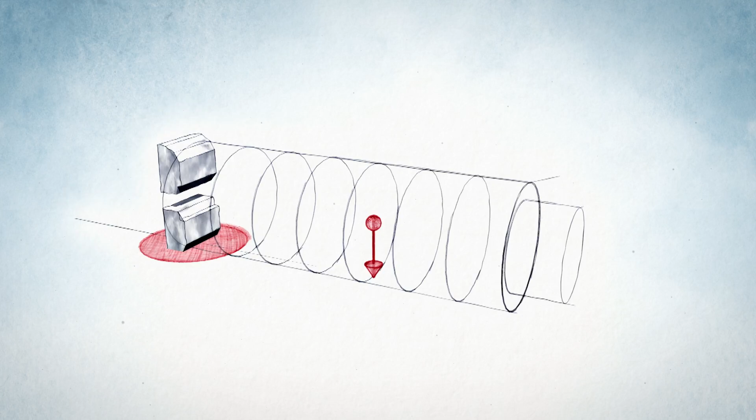With big builds, even the smallest mistake can be a huge disaster. From miscalculations to misunderstandings, these are the massive engineering mistakes that only an expert can hope to fix.

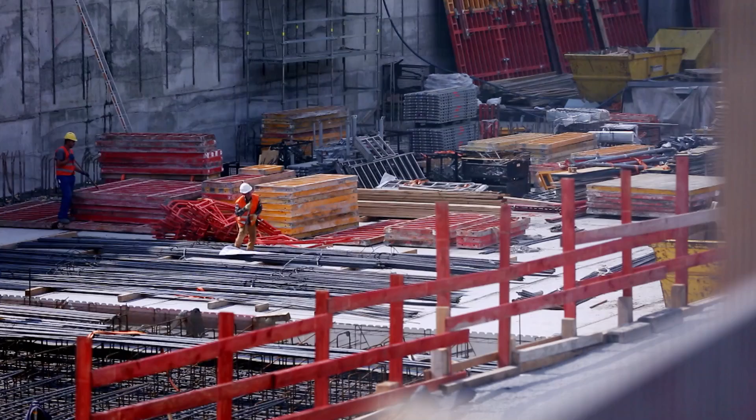When it comes to revolutionary design, sometimes we can learn from the past, other times we can improve on it. But rebuilding on an old foundation can be a huge mistake. For this construction calamity, we head to Pennsylvania, USA, and a famous bridge that fell from grace.

This is a massive fail. It's utterly incredible that no one got hurt. If a train was going over it, it doesn't bear thinking about. What was once considered the eighth wonder of the world is now a relic of engineering oversight.

The small town of Kinzua, like many other places in Pennsylvania, was central to America's steel production. In the 1880s, demand spiked and trainloads of coal were needed to feed the factories. Railroad engineers faced a giant obstacle, the steep, deep Kinzua Gorge off the foothills of the Appalachian Mountains. The trains had to get through, so they set to work on one of the most ambitious construction projects of the day, the Kinzua Bridge.

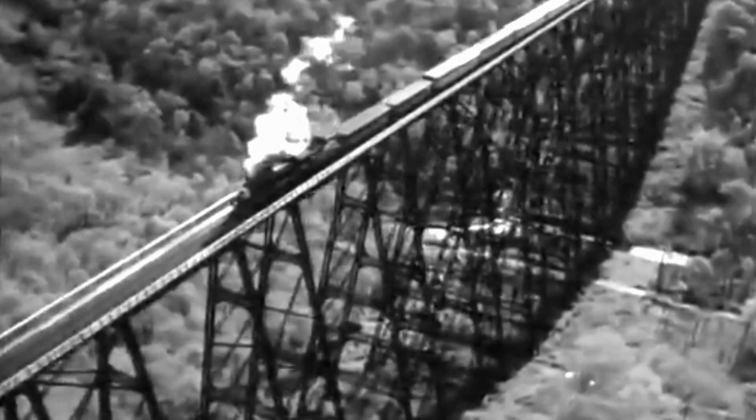Completed in 1882, at over 300 feet tall and 2,000 feet long, Kinzua Bridge was the tallest railroad bridge in the world. At the time, this was pretty much the eighth wonder of the world. It was such an unbelievable achievement. Even with today's technology, this would be a challenge, let alone back in the 1800s. So to actually achieve a viaduct over that size gap was incredible.

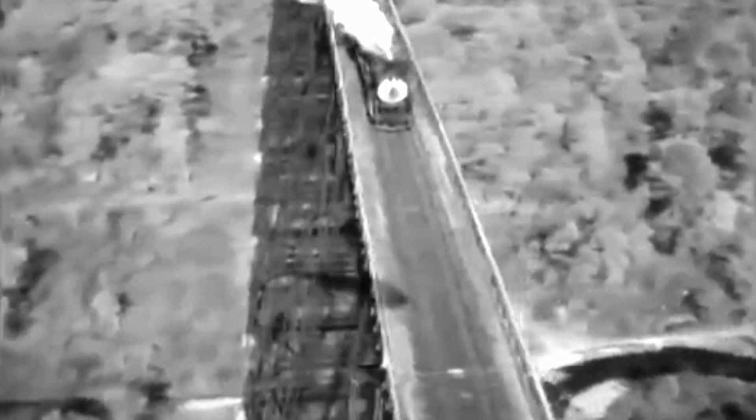Jerry Clark from the Bridge Foundation knows what made this build so epic. Other railroads went around the Kinzua Valley. The bridge went across it and used every bit of the engineering technology available during that time. To achieve this shorter direct route, the bridge had to be high, long, and capable of supporting heavy coal trains. Engineers ruled out the conventional bridge-making materials, stone and cast iron, instead choosing wrought iron.

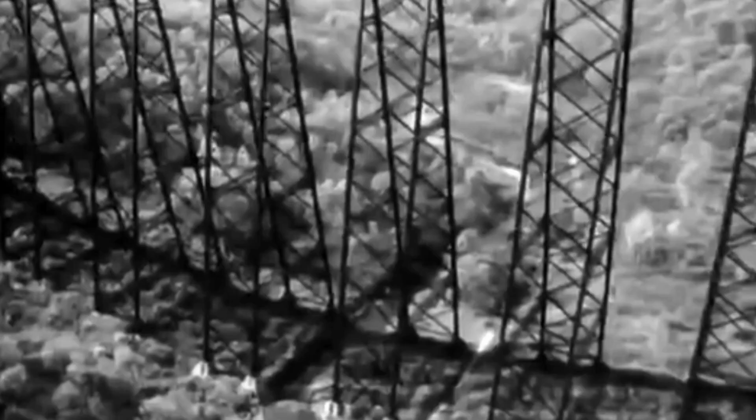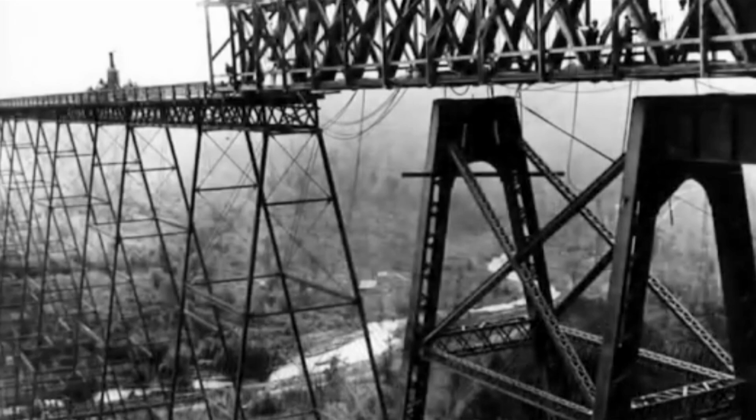Building a bridge of this size out of stone or brick would have taken forever, and using cast iron would have been too brittle, so they looked to wrought iron as a suitable material. Wrought iron had another advantage too. It's malleable. So they used sheets of iron to create an innovative support structure known as phoenix columns. These phoenix columns were made out of wrought iron that was folded around and held together with rivets, and this made them stronger and lighter. The revolutionary design was also quicker and cheaper to build.

However, within a decade, locomotives doubled in weight. This meant more strain on the bridge and more vibrations. Vibrations are not a bridge's friend. You expect them up to a point, but here we had a tall, long bridge with trains going over. The trains were getting heavier and heavier. They had to be careful not to push it too far. The material could withstand it to a point, but whatever they did not want that material to crack.

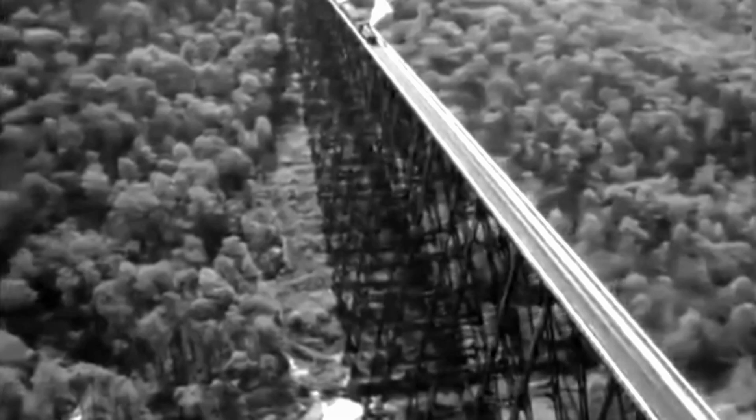To minimize vibrations, trains were forced to cross at just 8 kilometers an hour, not the most practical solution in a fast-moving world. Fortunately, an alternative was now readily available: steel. At the time, steel was the strongest, lightest and most flexible bridge-making material around. So it sounds crazy, but they actually ripped the old Kinzua Bridge down and rebuilt it in steel.

No bridge meant no coal, so a quick construction was essential. And in just a matter of months, 120 men erected the new bridge. 90 days is all it took to completely rebuild the tallest railroad bridge in existence. The new steel bridge used the original trestle design, with large A-frames supporting the pier on top. It could now carry as much coal as the steel mills needed. But in an effort to save time, a decision was made that would turn out to be disastrous.

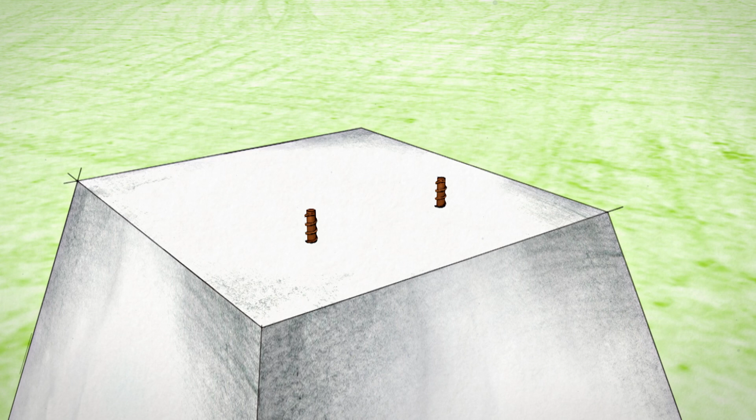Rather than installing new steel anchor bolts to hold the bridge in place, the legs were secured to existing bolts. They were too short, so engineers used extending nuts called collars to bridge the gap. So replacing these anchor bolts would have taken forever. You would have needed to dig out, blast away. It would have been a real hassle. So instead, they just put these collars over the top of it.

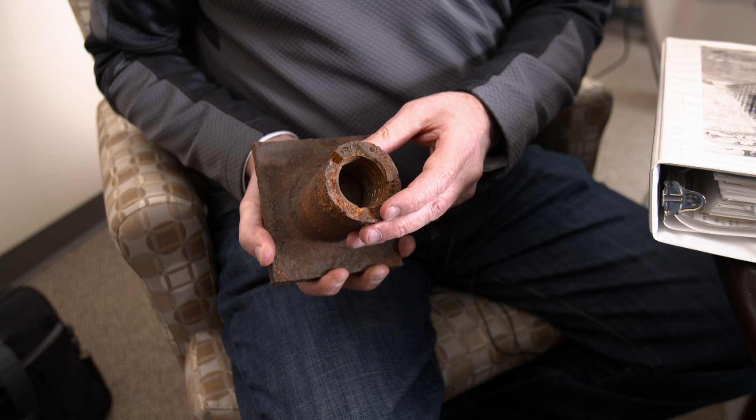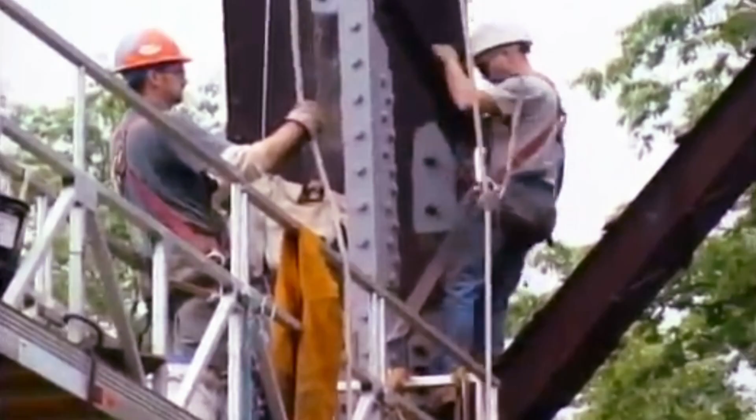At the time, the collars seemed a reasonable solution, but they hadn't completely factored in Mother Nature. This quick fix did the trick, and the bridge carried freight and passenger trains for over a century without incident. In 2002, a maintenance team discovered corrosion on the bridge's legs. They closed the bridge to trains and pedestrians and began repair works.

But in the summer of 2003, disaster loomed. An epic tornado spiraled towards the Kinzua Gorge. Structural engineer Brian Emberg was on the restoration team. In July of 2003, I got a phone call, middle of the afternoon, that a tornado had hit the bridge. I jumped in my vehicle right away, made the trip, and got here right about dusk. And it was clearly a tornado scene, trees everywhere, clouds and mist.

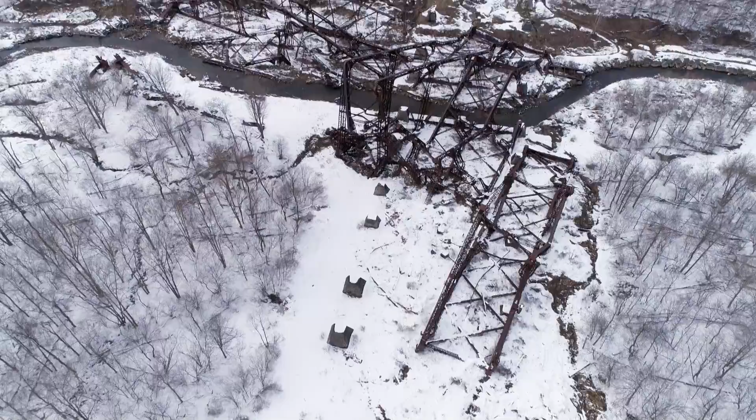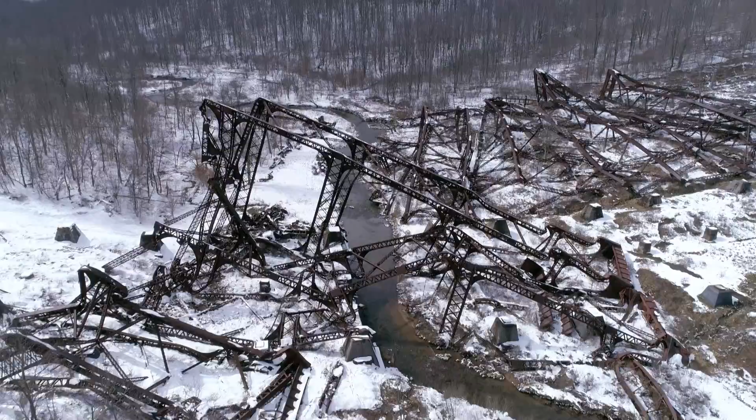I met with the crew and made my way down here to the edge of the ravine and turned the corner, and the valley just looked filled with smoke like you would expect after a battle. You could barely start to make out the structure in the fading light, and you could see pieces of steel emerging from the fog, and then what remained of the structure still standing. It was clear it was a catastrophic failure. The 160-kilometer-an-hour tornado had sent a huge section of the bridge crashing to the valley floor.

This must have been so frustrating. They were onto this problem. They saw it. They were acting on it. So if it struck a few months later, they would have been fine. This is such bad luck. Although devastating to the repair team that spotted the corrosion, closing the bridge had potentially saved hundreds of lives.

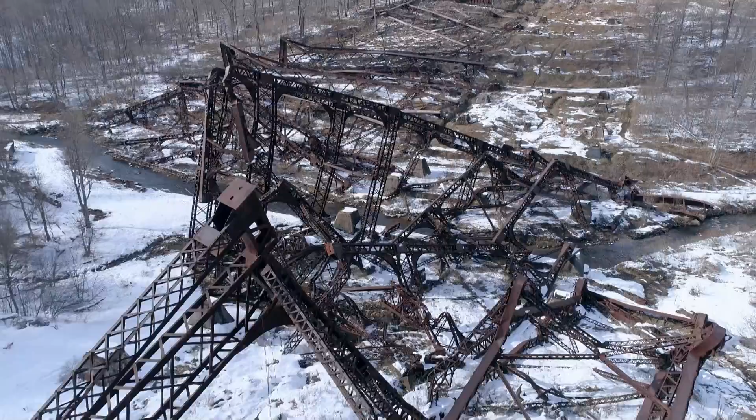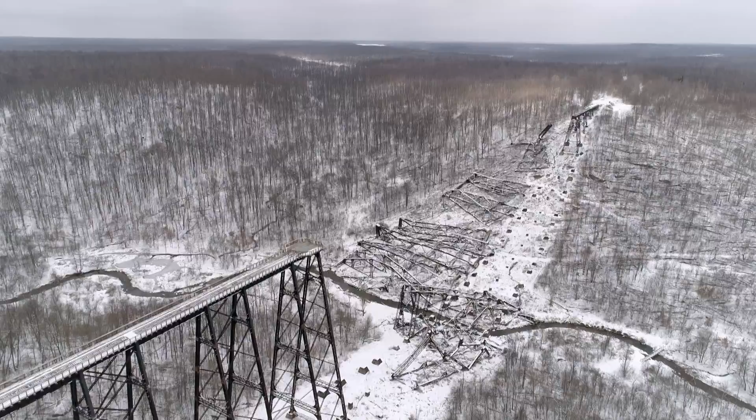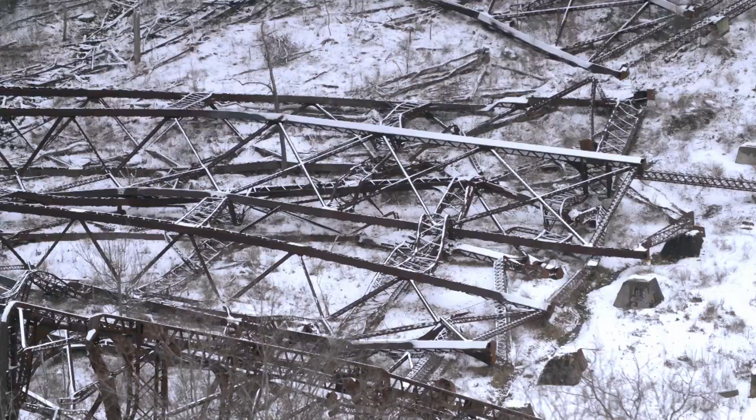To have such a freak of nature storm come in and take it down was really devastating to my crew, my team, and me personally, that we weren't able to get to it and save it in time. Had the tornado arrived a year later, we'd have finished with the repairs and hopefully sustained the structure so it would have survived the storm. The day that it fell down in there, you kind of felt like you lost a family member.

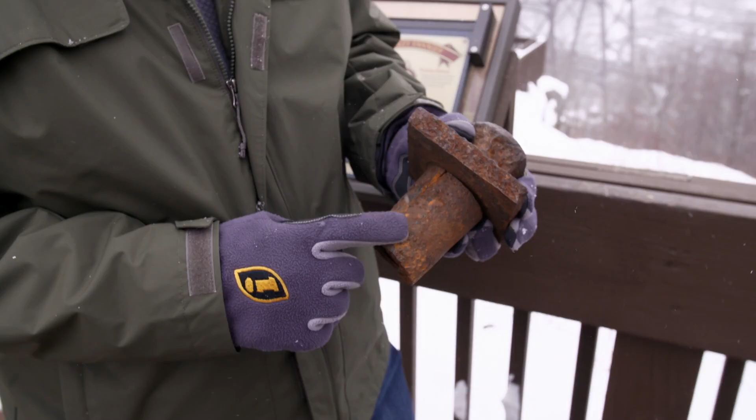Brian and his engineering team suspected the original iron anchor bolts and new steel collars were to blame, and their suspicions were confirmed in the wreckage. So the next morning, I went down to the valley and found these anchor bolts and couplings littering the floor of the valley everywhere, where they had ruptured and failed at almost every single pier. The choice not to replace the iron anchor bolts with steel was catastrophic.

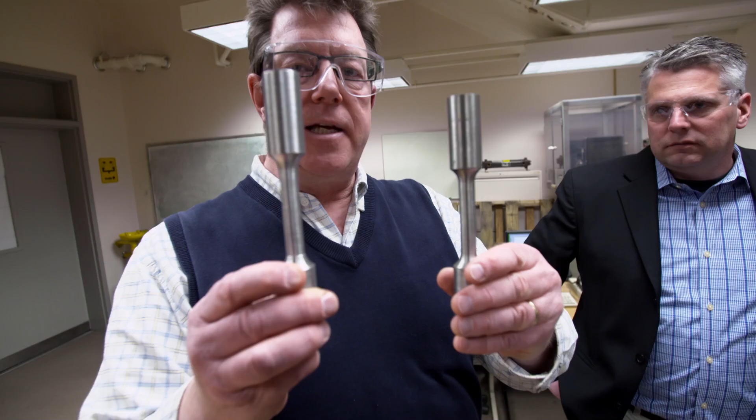To demonstrate steel's strength and flexibility, mechanical engineers Dr. Mark Zupan and Dr. Tim Topoleski are using a load frame. The one on the right is 1018 steel, and the one on the left is cast iron. You can kind of see that they look similar. So looks can be deceiving. And what we're going to do is test the two of them and see what happens. The load frame measures the amount of force required to fracture the metal by pulling it from each end.

First up, the iron. In tension, cast iron expresses a brittle behavior, or a behavior in which it'll fail without warning. Now, the steel. There it goes. The steel exhibits what we call ductile behavior. You'll see the specimen narrow in the middle, and that's what we call yield behavior. And essentially, the specimen is absorbing energy to allow it to handle more load. And therefore, in contrast to the cast iron, you're going to get a warning before it fails.

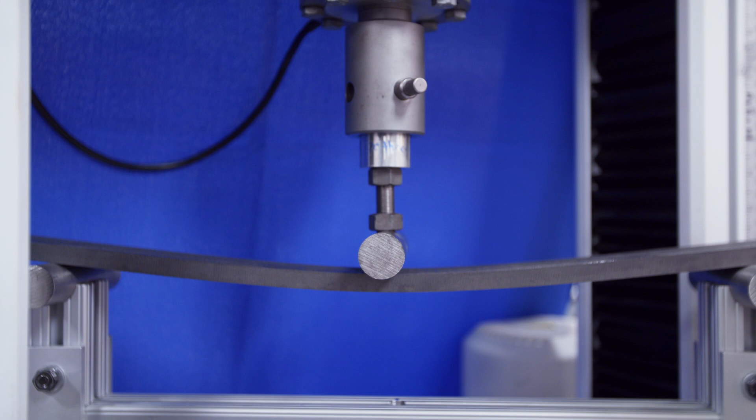So, although similar, steel's structure gives it increased flexibility, whereas iron can crack without warning. Metals can either be brittle or ductile. A brittle material like cast iron shatters when it breaks, much like glass. A ductile material like steel, though, deforms before it breaks. So it gives you a visible warning sign that failure is about to occur. So when you use steel in a bridge, you get a warning that it's about to break before it does.

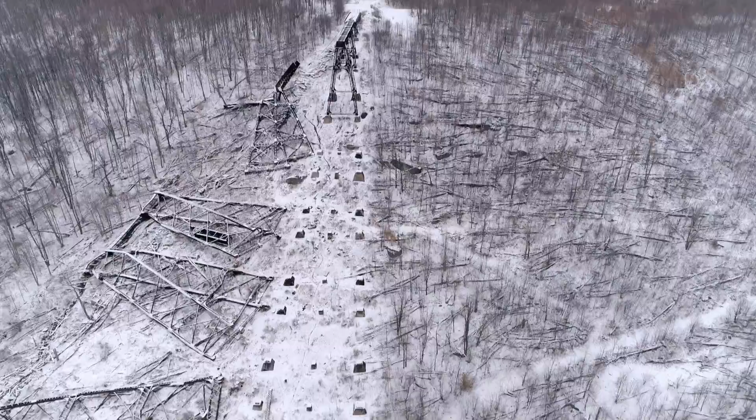Although steel was clearly the stronger and more flexible material, the bridge's iron anchor bolts didn't fail until the tornado of 2003. The problem was that the original designer didn't think there was going to be uplift. An uplift comes from wind blowing on the towers. When wind blows on the tower, it wants to try and overturn it, and so on this leg, there would be uplift. The original designer, he used these because he didn't think there would be uplift, when in fact there would be with a 100-mile-an-hour wind.

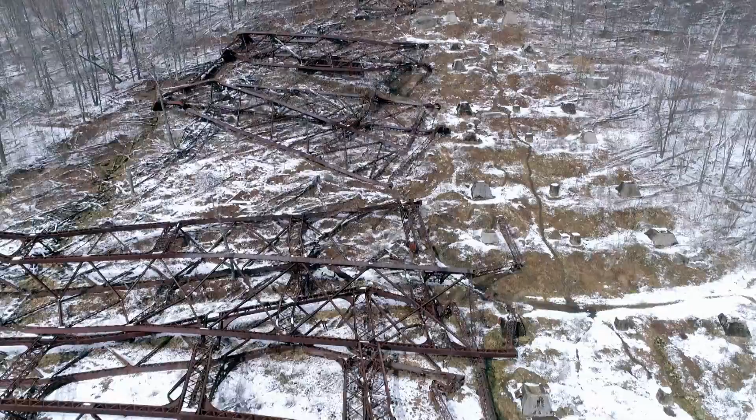And it turned out to be inferior, especially after years of wear and tear, and it cracked. A combination of extreme weather and the decision not to replace the anchor bolts over a century ago was the undoing of this epic piece of engineering. This was a hugely ambitious project, and at the time it really pushed the boundaries of engineering knowledge, and it looks like a tiny miscalculation and the use of these collars unfortunately led to the demise of this bridge.

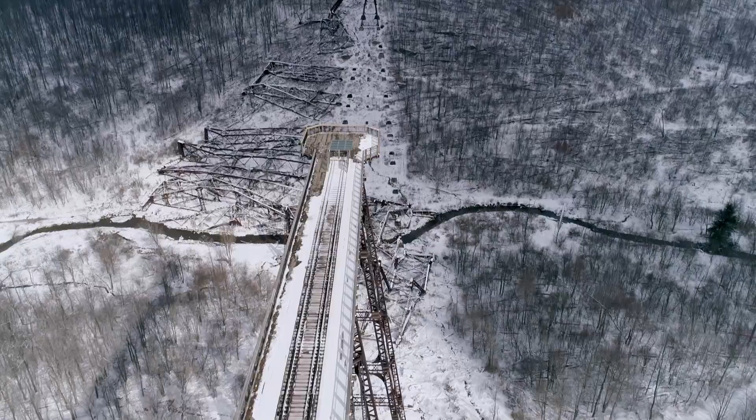Today, around 180 meters of the structure still stands. Rather than tear it down, it was kept as a monument to mankind's ingenuity in engineering. Everything here could have been scrap metal, but there were people that had the foresight to say, this is worth saving. Actually, there are more people that come to the bridge after it was down than when it was up.

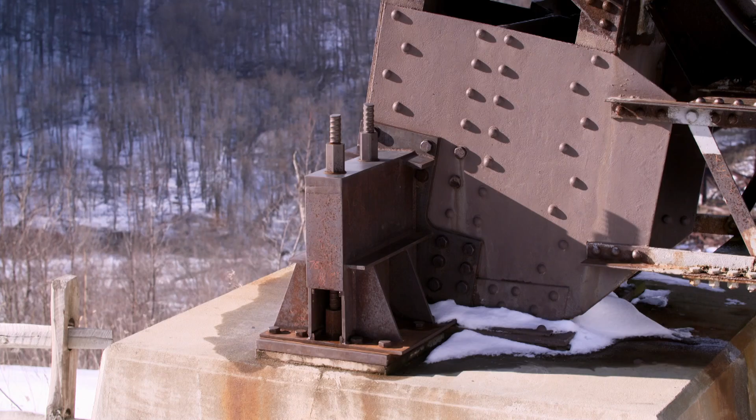To prevent any further collapse, Brian and his team have devised a solution. It's no surprise that it includes steel anchor bolts, an idea that the original engineers overlooked. When it comes to the foundations, you should never cut corners. It may have taken over 100 years, but that lesson was learned in spectacular style.

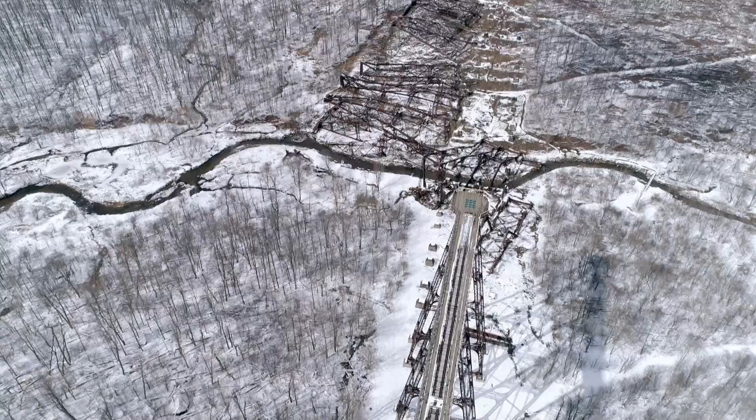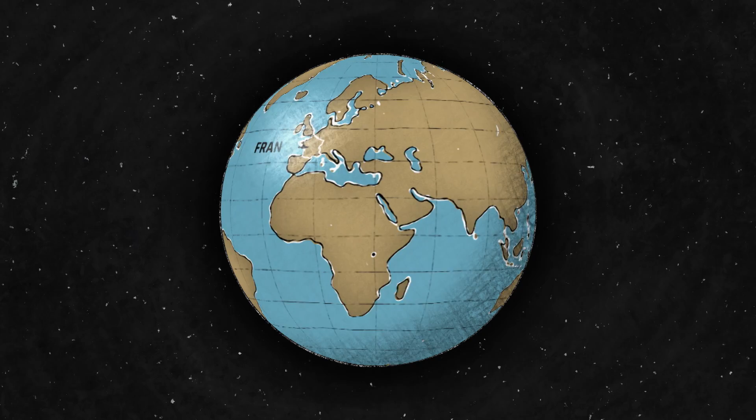Some construction calamities are unhappy accidents, but other times, engineers really should have known better. Like this story in northern France, and a cathedral that's experienced a catalog of catastrophes. This one is a blockbuster of a building blunder. It seems the engineers' zeal to reach the skies clouded their better judgment. This cathedral has been the victim of a combination of tragedy and folly. And when modern-day engineers tried to make a fix, it almost ended in disaster. It's a miracle it's still standing.

Beauvais, a small city in northern France. But there's nothing small about its 800-year-old centerpiece, the gravity-defying Cathedral of Saint-Pierre. So we've got Sagrada Familia, yep, Notre Dame, yep, St. Paul's, but St. Pierre's of Beauvais. Although little known outside of France, the ambition of this cathedral once rivaled any other on Earth. Dr. Tom Nixon is an expert in religious architecture.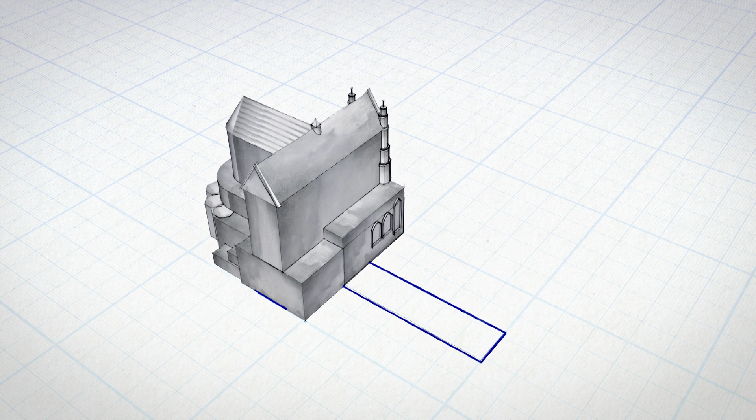Beauvais Cathedral was begun in the 1220s by an extremely ambitious Archbishop, Bishop Miles of Nanteuil, and his vision for this cathedral was really something that would trump all the other major churches in France and the region. Most cathedrals are designed in the shape of a cross, with three main sections: the choir for the clergy, the transept, which forms the arms, and the nave for the congregation. The nave is often long and grand, but here there was an obstacle.

Now, Beauvais could never be particularly long because the site was constricted by the presence of the Bishop's Palace at the West End. So it could respond to the ambitions of its patrons by being, first of all, very wide, but it could also be very, very tall. And this church, as built, was taller than any Gothic building ever built. And size was very important. With cathedrals, just like stadiums and concert halls, the aim is to have as much space as possible under one roof. But of course, the taller and wider you go, the bigger the engineering challenge. And the greater the chance of making catastrophic mistakes.

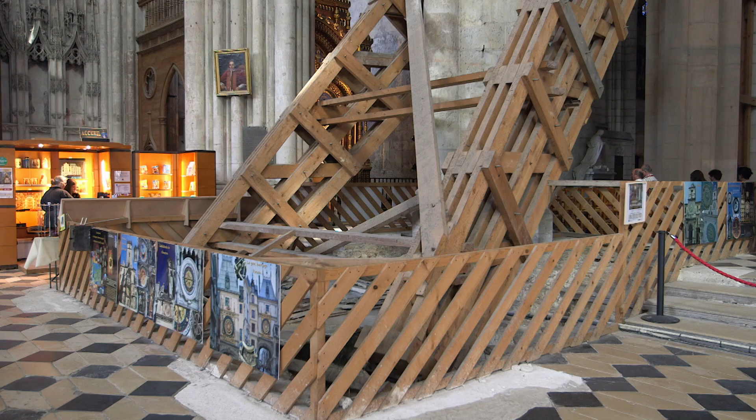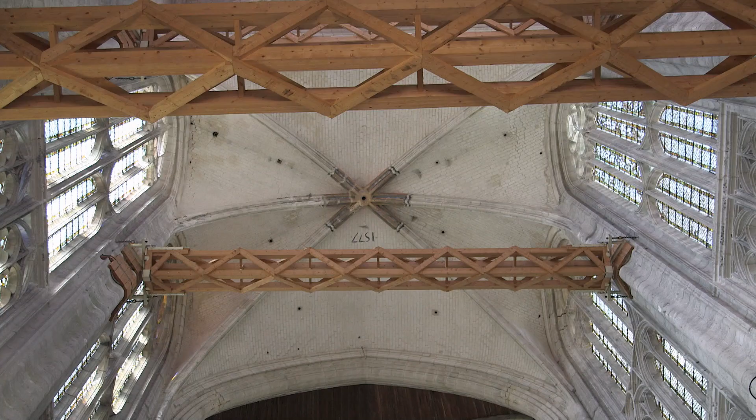On close inspection, the grandeur of Saint-Pierre is overshadowed by centuries of repairs that literally hold the building together. And it's all because the original engineers were more focused on height than stability. In fact, their drive for height was so relentless that they had to hold up the tall, unstable walls from the outside.

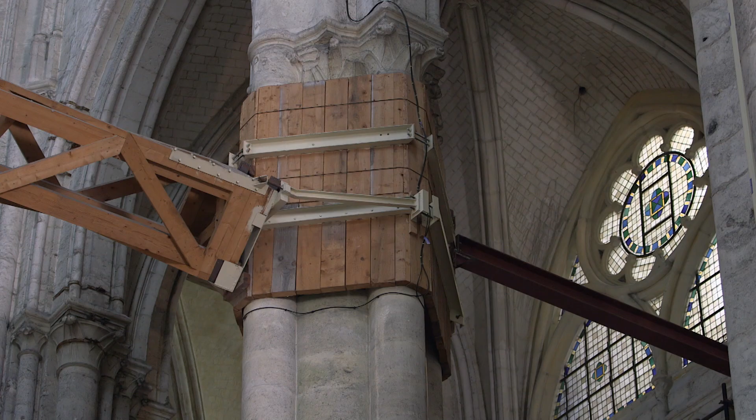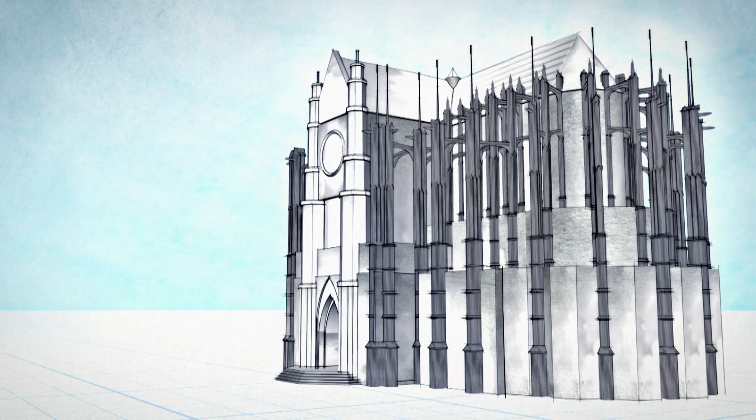So it's really remarkable to be able to come up here to the upper parts of the cathedral. Up here, we can really get a sense of the way that this forest of flying buttresses supports the upper levels of the choir. And what's really extraordinary, I think, is many of these flyers, these piers, are still super slender. Flying buttresses act as an exterior skeleton to support the cathedral, but are built to look ornate and elegant, not like mere scaffolding. Engineers hoped these buttresses would be strong enough to prevent collapse.

They're working very hard to ensure that the windows are not obstructed at all, so that we have this wonderful kind of sense of vertical thrust from the cathedral, even though, of course, the reality is the very opposite. What we have is gravity trying to pull this building down.

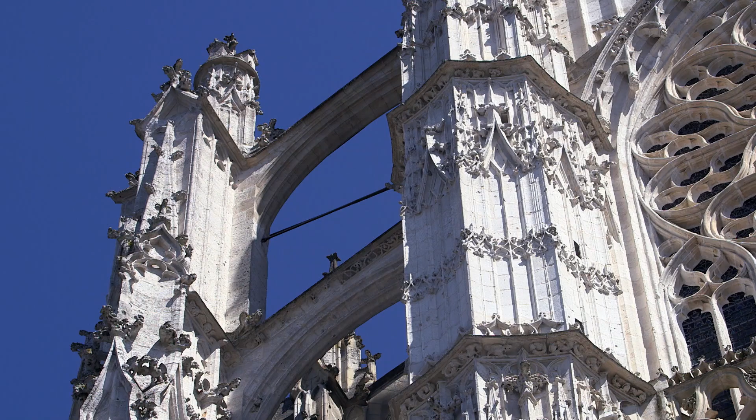Back in 1284, Saint-Pierre's ongoing battle with gravity came to a head when a fierce storm hit the town of Beauvais. The devastating winds twisted the flying buttresses, forcing them to breaking point. Suddenly, the high vaulted ceiling came crashing down. The city didn't let that stop progress. The damage was repaired and construction continued.

In the 1500s, the cathedral reached dizzying new heights, with the lantern tower soaring over the choir. Jean-Lucien Guénon, one of France's chief architects, explains.

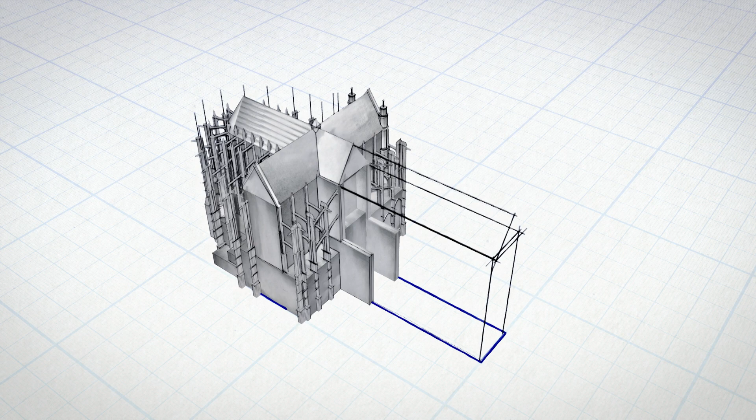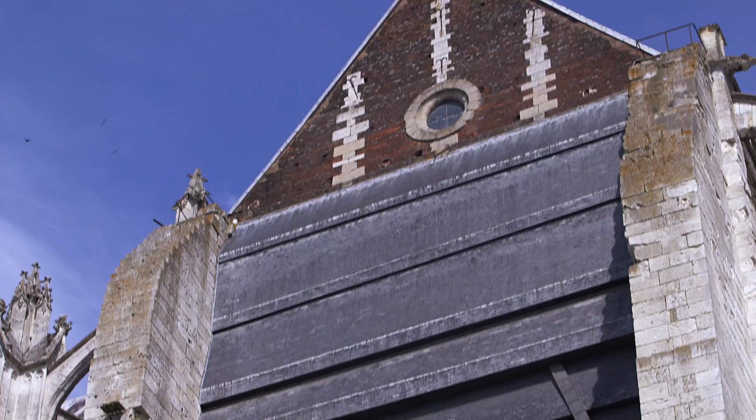Defying centuries of cathedral construction logic, Saint-Pierre's was built with only the start of a key structural element: a nave. So here we can see the junction of the 10th century cathedral, which originally extended much further to the west, and the new work, the new Gothic church begun in the 1220s, although what we're looking at here is really the transept in the very beginning of the nave, begun in the 16th century.

The ancient church didn't provide any support for the massive new cathedral. Leaving the nave unfinished was a fundamental error. The huge weight of the towering walls was pushing them outwards. They went to all the trouble of digging 10-meter deep foundations, which would have been a huge undertaking, and yet they didn't finish off the nave, which is the essential part to keep the rest of the cathedral standing.

Fixing the damage caused by the collapses finally drained cathedral finances, and construction of the nave was put on hold for a few hundred years.

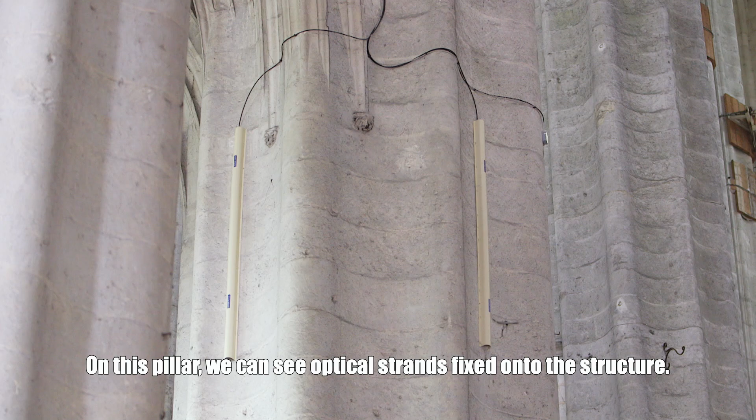On this pillar, we can see optical strands fixed onto the structure. Optical strands are very accurate sensors dedicated to the measurement of strain and displacement of the structures. The resolution of these sensors is about 1 micron. A micron is 100 times smaller than a hair. 1 micron might seem like a tiny amount, but when you've got thousands of tons of stone shifting around, I'd want to know exactly what was going on.

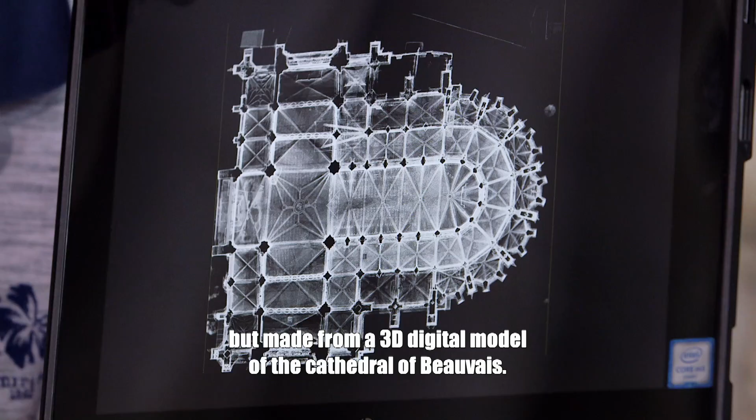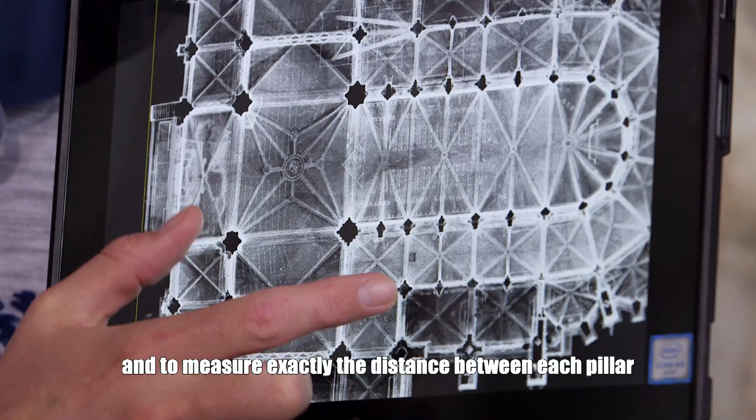While monitoring for modern-day movement, Guillaume Caron is laser mapping the cathedral in 3D to check for hidden defects in the original construction. This image is a kind of blueprint, but made from a 3D digital model of the Cathedral of Beauvais. And what is interesting from this information is it's not a manual drawing, it's got from measures. So from this blueprint, or digital blueprint, we can highlight some deformations and measure exactly, for instance, the distance between each pillar in the cathedral.

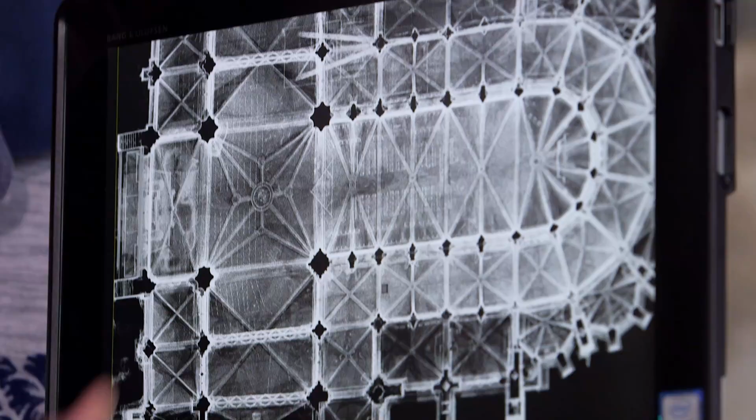Laser scanners bounced high-energy light off every surface in the cathedral, creating a highly detailed picture of the building. It was so detailed, they could see things that weren't visible to the naked eye. What Guillaume's team has discovered is more than a little disturbing. So, using this image, for instance, we are able to highlight that the pillars that are on the southern part of the choir are very nicely aligned, but there are some misalignments between the ones in the northern part.

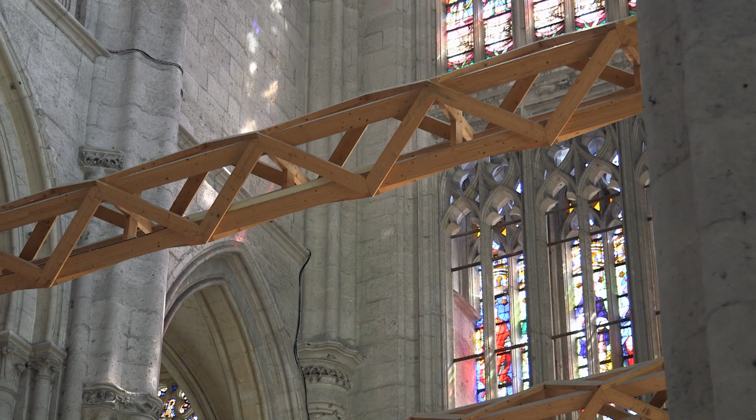These misalignments have remained undetected throughout the ages, but reveal a whole new instability threat. We were surprised by these deformations and the fact that the building is still not collapsed. To further stabilize the walls, engineers have taken the radical step of installing giant braces. The braces, they're not pretty, but at least the cathedral is still standing. This building is clearly a survivor.

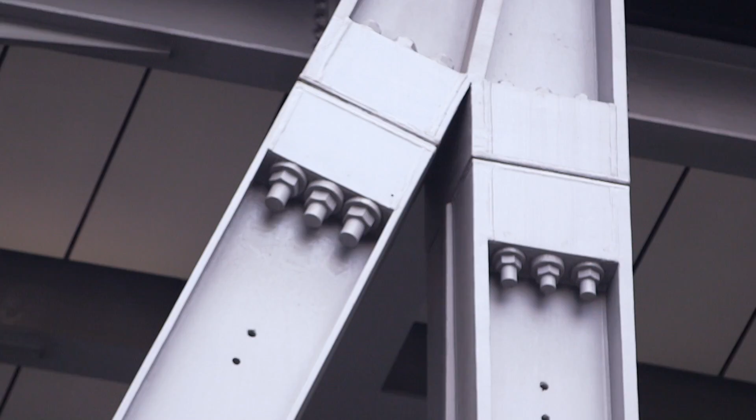Engineers building groundbreaking projects have to consider every worst-case scenario they can dream of. But sometimes, even the best-laid plans can turn dreams into unexpected nightmares. Our story begins in Illinois, where a radical piece of engineering dating from 1900 has inadvertently opened the Great Lakes to invasion. 5 to 10,000 of them just erupting out of the water. I've been struck in the head, one nailed me right in the thigh. This Army engineering solution is truly shocking.

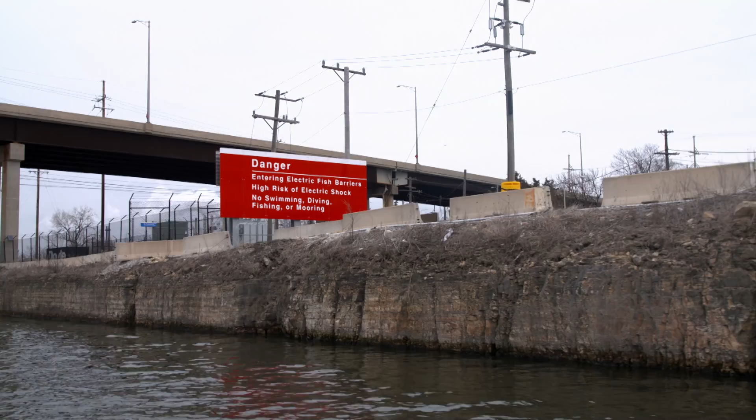Chicago, Illinois. In the 19th century, the Windy City grew from a staging post to one of the most influential places on Earth. Home to hot jazz and deep dish pizza, Chicago is the place to be. And in the summer, there's no place you'd rather be than on the nearby shores of Lake Michigan. Lake Michigan is one of North America's 5 Great Lakes, the largest group of freshwater lakes on the planet.

Jennifer Caddick represents the Alliance for the Great Lakes. The Great Lakes region supports a multi-billion-dollar tourism industry, but there's also a thriving hunting and fishing economy in the Great Lakes region as well. People come from all over the world and all over the states to hunt, fish, and recreate here.

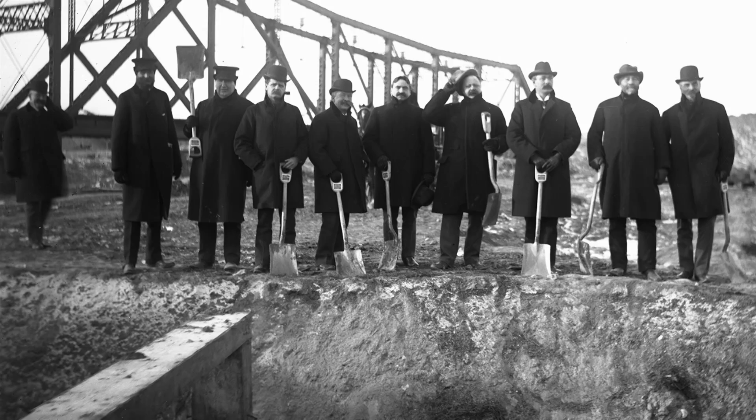By the late 1800s, Chicago's rapid growth posed a problem: more and more sewage. Back in 1900, Chicago had problems that their sewage, all of their waste, was flowing into the Chicago River, and then that was flowing out into Lake Michigan and right towards their drinking water intakes. To stop sewage from contaminating the fresh water of Lake Michigan, engineers came up with an epic idea: to send the city's waste in another direction by reversing the flow of the Chicago River.

Work began on the Chicago Sanitary and Ship Canal, connecting the Chicago River with the Des Plaines River, 45 kilometers away. The new waterway connected Chicago with the Mississippi Delta and ultimately the Gulf of Mexico, not only solving the sewage problem, but also creating a trade route. However, the ingenious engineers had unknowingly opened up the Great Lakes to a major threat. I'm stating the obvious here, but connecting 2 waterways that have never been joined before sounds like a recipe for disaster. This disaster came in the form of an invasive interloper, the Asian carp.

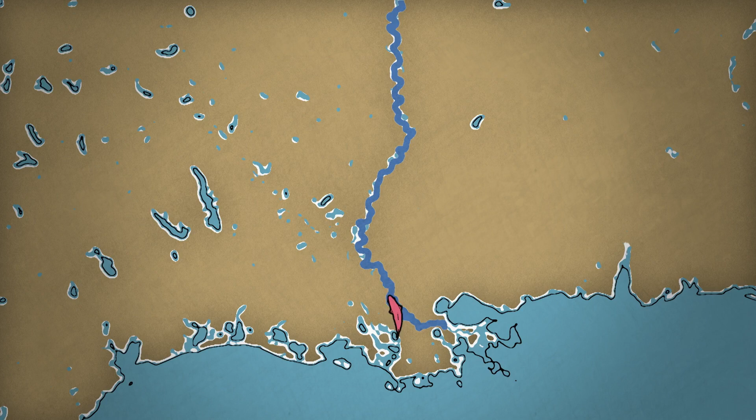Initially, in the 1970s, the Asian carp were brought in intentionally to eat algae in sewer treatment plants. However, they have since escaped via flooding into the surrounding waterways and are now running rampant throughout the Mississippi Delta and right up toward the Great Lakes. Asian carp are a highly invasive species that spawn rapidly. They overwhelm native fish, consuming their food and threatening their very existence. By the 1990s, the carp had spread to the Mississippi Delta. Today, they are within mere miles of Lake Michigan, and they are still on the move.

Asian carp are not only a threat to native fish, but they can also be potentially lethal to humans. They weigh up to 45 kilograms, and when startled, they can leap out of the water unexpectedly. With a tourism and leisure industry worth billions of dollars a year, the last thing the Great Lakes need is Asian carp.

To stop the subaqua menace in its tracks, an engineering solution is in place at Romeoville, 50 kilometers southwest of Chicago. It's an underwater electric fish barrier. The barrier is operated by the U.S. Army Corps of Engineers. Colonel Reisinger is in charge.

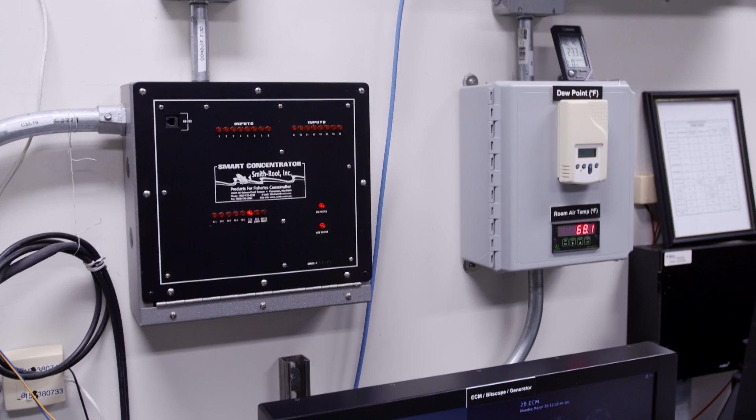This is our control facility, which puts electricity into the Chicago Sanitary and Ship Canal. And what you see here are the control systems that allow us to control the amount of voltage which we want to put into the water. That allows us to have the most effect on the Asian carp that we're trying to deter here in this waterway. The input power for one of these systems is 1.5 megawatts. It's about 2,000 volts per electrode.

Colonel Reisinger is on a mission to hold back these foreign invaders. We are standing on top of barrier 2 Alpha. Each barrier unit generates an electrical field reaching across the canal. As the fish moves from downstream to upstream, they run perpendicular to that electric field generated. When that fish hits that wide array field, our intent is to create enough voltage potential there that the fish decides it's uncomfortable enough that it just turns around and goes back down river.

Romeoville actually has 3 separate electric barriers at intervals along the canal, in the hope that if a carp gets through one, it will be stopped by the next. Further up canal, we have barrier 2 Bravo, and then even further up from there, we have what we call the demonstration barrier. If that fish pushes through the wide array field and gets into the narrow array field where we have a higher voltage drop potential, at 2.3 volts at the surface of the water,

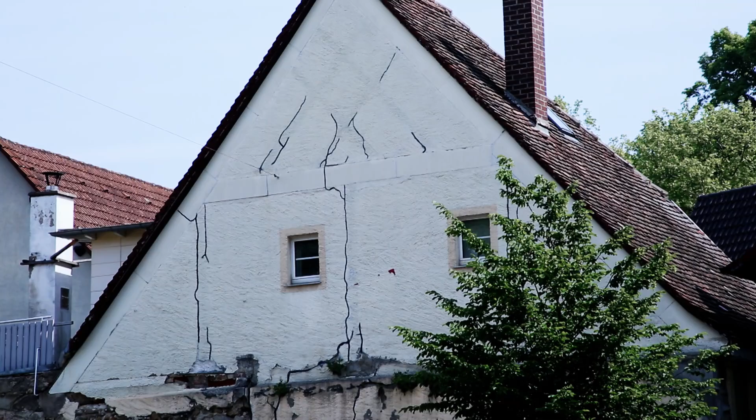Anxious residents called in geologists who discovered something extraordinary. Staufen had indeed been sinking, but bizarrely, the ground under the town had now begun to rise. The team quickly zeroed in on the culprit, a project to heat Staufen's town hall with a green energy source.

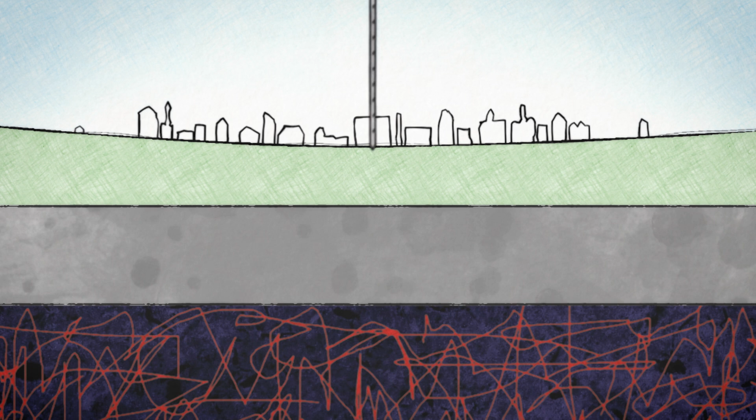The Earth's core is extremely hot and full of geothermal energy. To harness this geothermal energy, you need to drill down straight into the Earth's crust. This heat energy is then drawn up the borehole to the surface, where it powers heating and cooling systems. Drilling began in 2007, just before the town started to crack.

When I heard about the idea, when they wanted to repair the building, that they want to use geothermal energy to heat and cool the house, I said, what a good idea. And the town council unanimously said, what a good idea. Free energy might sound like good news, but to reach the heat, engineers unintentionally triggered a slow-motion earthquake.

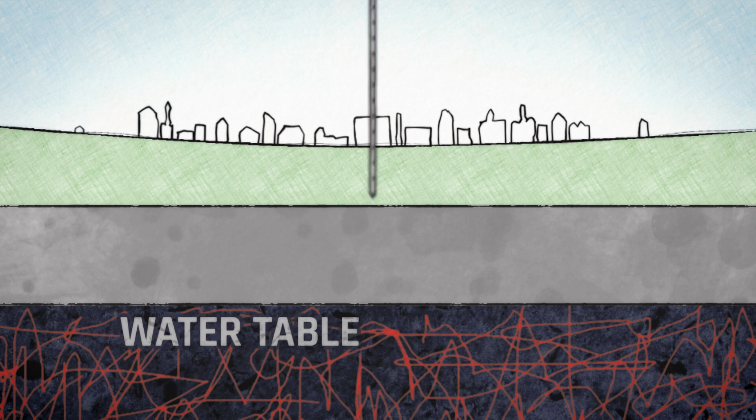To tap into this geothermal heat, they drilled a hole about that wide, 6 inches, about 140 meters or 459 feet down into the rock from the surface. There, they reached the water table. Anywhere on the Earth, if you drill down deep enough, you're going to hit something known as the water table. And this is when water from the surface trickles down and settles at a certain level. That level will differ in height depending on where you are, but it's always going to be there.

When they drilled down into the water table, there was an initial drop in pressure, and on the surface, things began to sink. Loss of water explains the ground sinking, but with the town rising, something else had to be going on.

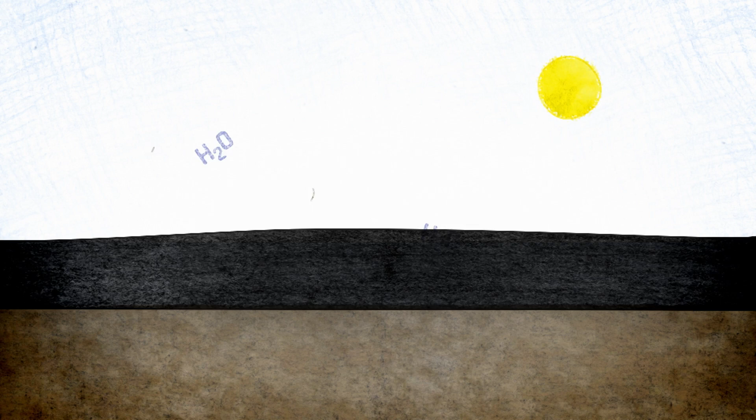After further investigation, the geologists realized the problem. The town was built on this, anhydrite. Anhydrite was formed millions of years ago by the evaporation of salt water on ancient seabeds. Environmental scientist Konstantin Kinzua explains. So there's basically just a big layer of anhydrite right underneath Staufen.

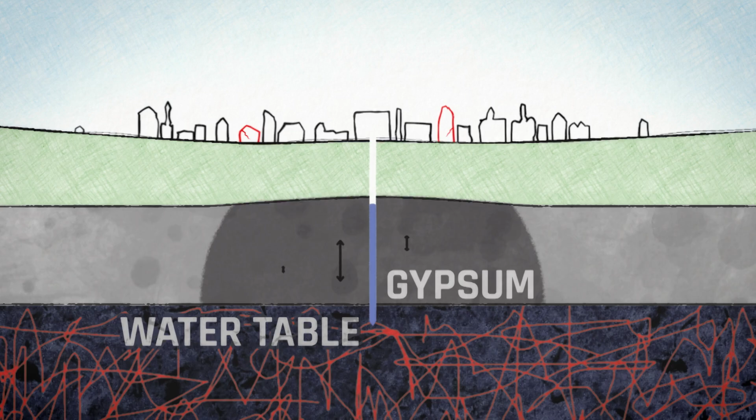This commonly occurring mineral rapidly absorbs water. So when anhydrite and water mix, it expands and forms gypsum. The expanding gypsum creates subterranean pressure. Imagine the layer to be something like a sponge, and you pour some water on it so it expands or it bulges up right at the spot where you pour the water on it. And the surface itself bulges the same way. So if you have a house standing on top of it, the floor is basically tearing apart.

The geothermal boreholes had brought the anhydrite in direct contact with the water table. What I have here is a normal diaper. What this diaper has, and basically every diaper has, is superabsorber in it. And this superabsorber is going to act as our anhydrite. And once I pour water over it, it's slowly going to absorb the water. It also increases in volume by quite a bit, and that's the same thing that the ground is doing as well. So this is exactly what's happening underneath Staufen.

More than 10 years on, and the city continues to rise and crack. You've got to understand that this is relentless. Slowly but surely, the ground under Staufen is rising. Parts of Staufen have risen by up to 60 centimeters, and over 270 buildings are now damaged. So we're now right inside the town hall, and you see the cracks and the uplift, which has done all the damage to this ancient building.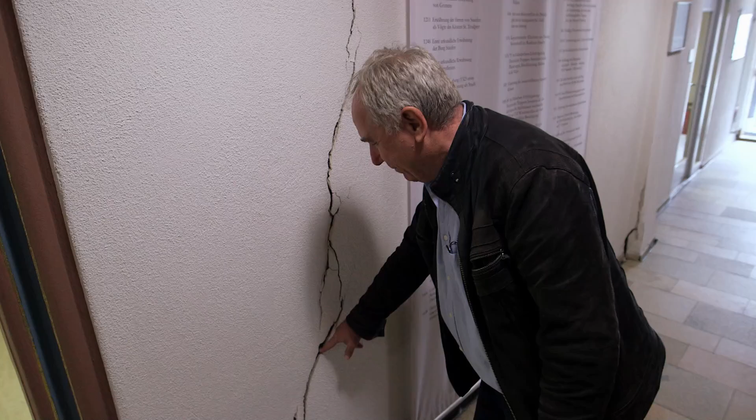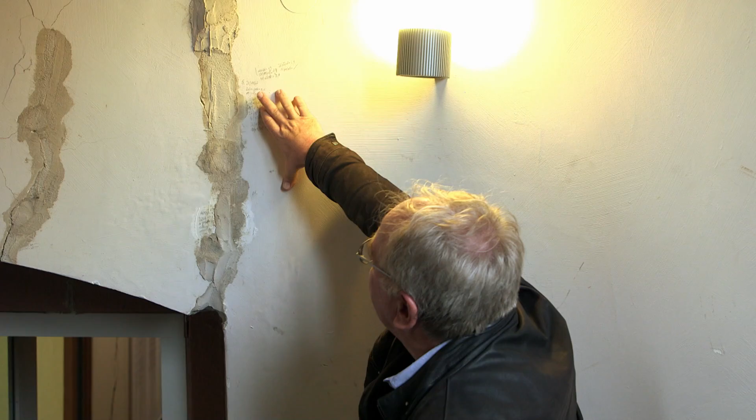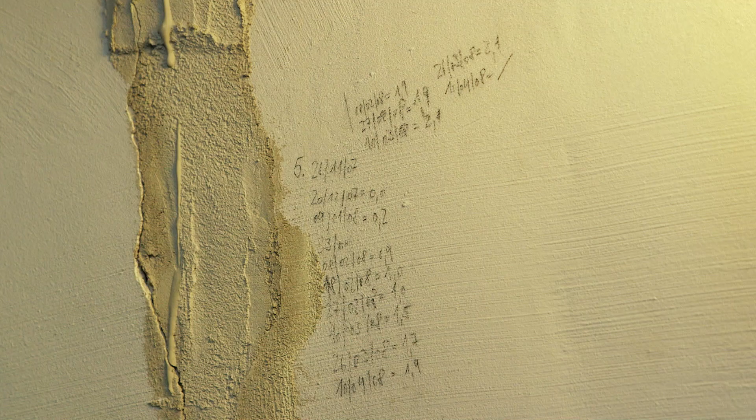Well, this crack, you see, it's one that starts right down in the basement of the building, comes up here, and you see the damage that has been done here to the building. This is a kind of logbook of the cracks, and when people started realizing, you see that they marked the number of centimeters that the building has moved. So we come up here in February, 6.9, in not even 1 month, in 10 days. Then if you add this all together, it comes to 15 or 16, even 17 centimeters. With their buildings crumbling around them, the people of Staufen desperately look for a solution to their anhydrite nightmare.

With the city in pieces, local authorities are working on a fix. The first stage was to plug the boreholes to prevent water from the surface from adding to the problem. Local geologist Sandra Heisler reveals how the town papered over the cracks.

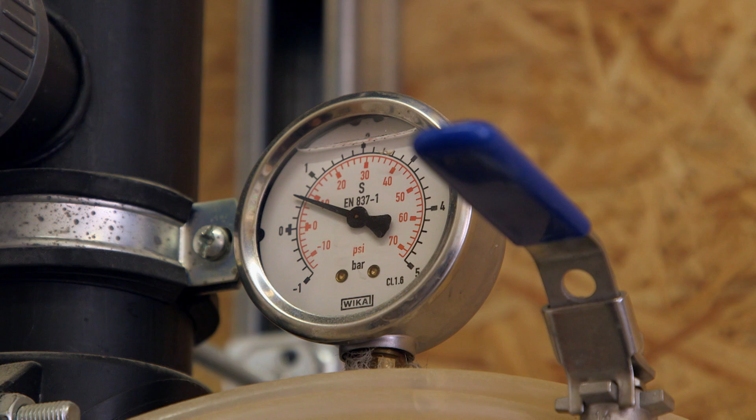But sealing the holes from above was not enough, as the anhydrite is still in contact with the ever-present water table.

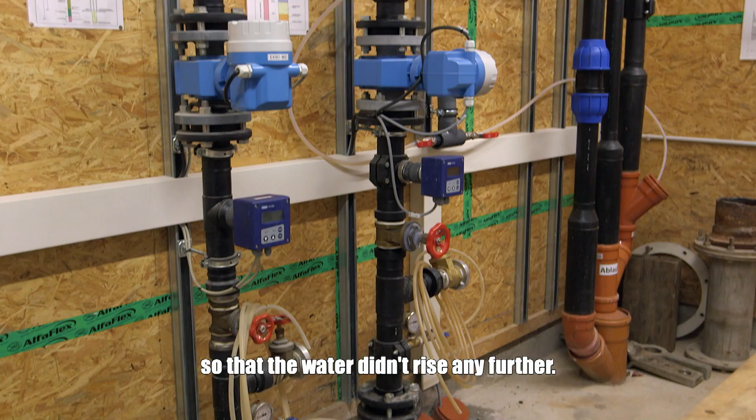By continuously pumping up groundwater, the process is slowed.

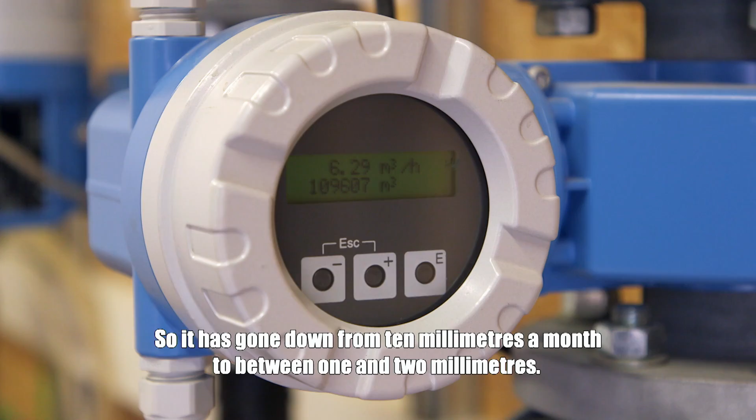Pumping out the groundwater is helping slow the destruction. But it's not a proper solution. It's like putting a Band-Aid on. But for now, all they can do is keep pumping. It's impossible to stop the anhydrite from absorbing water. Instead, residents must hope that it will cease naturally in time.